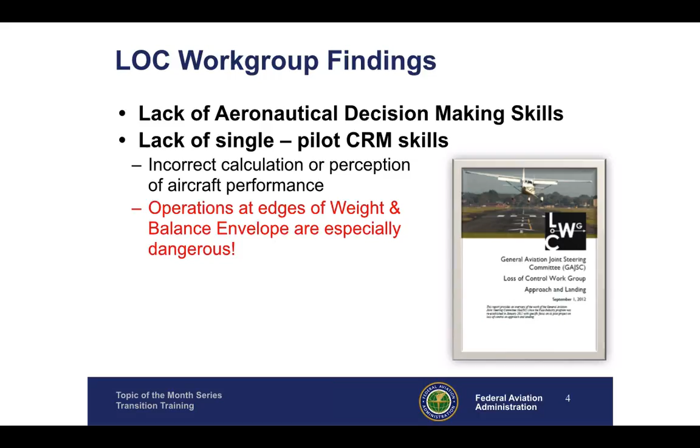Here are some findings of a recent study of loss of control accidents. Most fatal general aviation loss of control accidents cite inadequacies in aeronautical decision making and a subset of ADM, single pilot cockpit resource management skills. Occasionally, investigations have discovered causal factors resulting from unreasonable expectations of aircraft performance, especially when operating at the edges of the aircraft weight and balance envelope. That's why the Loss of Control Workgroup suggests improvement in pilots' understanding and calculation of aircraft performance.

When we speak of aircraft performance, we're usually answering three basic questions. How much can I haul? How far can I go? How long will it take me? It sounds simple, but an exquisite set of interdependent variables must be considered in order to answer each of these questions. Most of these variables have to do with aircraft performance, but the most important variable does not.

A good way to plan a flight is to decide how much weight you want to haul to what destination. Start with crew and passengers, then add cargo. If these items alone exceed your aircraft's capability, you'll either have to make multiple trips or get a bigger aircraft. Once you know how much you want to haul, you can figure out how much fuel you can take, and that together with your weather information will tell you how far you can go. If you have enough to get to the destination, plus alternate, plus reserve, you're golden. If not, you have to plan an en route fuel stop.

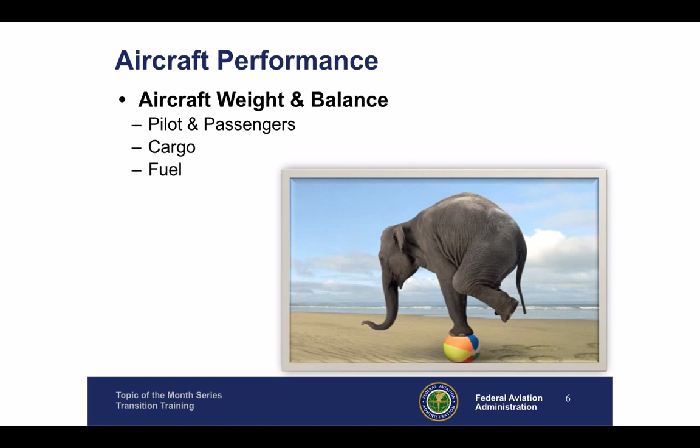But wait, there's more. You'll also have to consider your departure and arrival airport's runway lengths, obstructions, and expected density altitude. If the field is short and/or obstructed, you may not be able to safely fly with a full load. One more thing. Just because the book says the aircraft can do it doesn't mean that you can do it. Pilot skill and experience count for a lot when you're trying to duplicate Pilot Operating Handbook performance figures. So be conservative when you calculate your performance and consider adding a safety factor. Some pilots add 50% to their takeoff and landing calculations for safety.

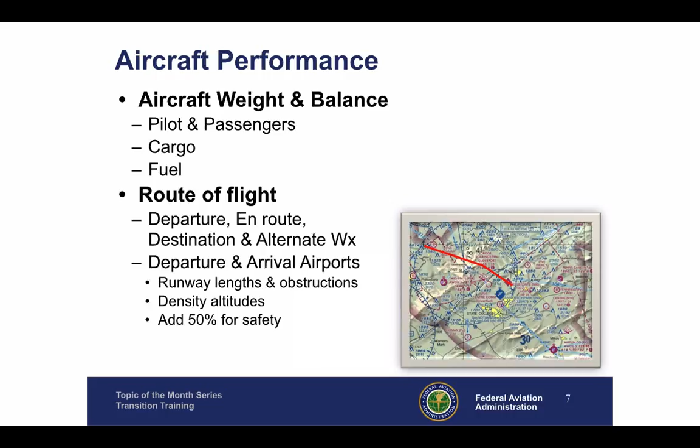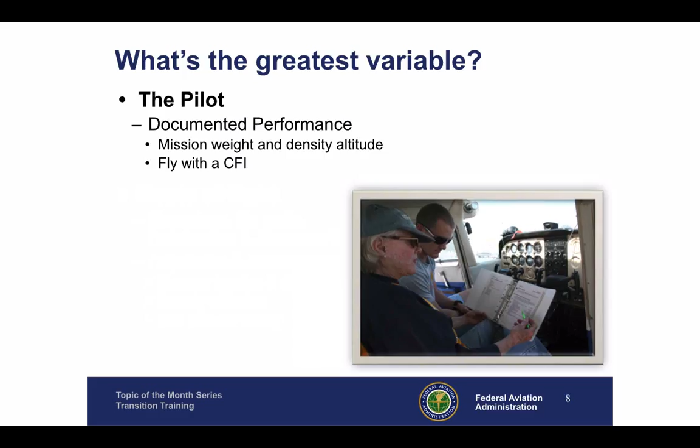Now we can figure all this out by consulting the POH, right? Well, maybe not. There's one more huge variable to consider, and I bet you know what it is. So what's the greatest variable in all this? That's right, the pilot. Let's face it, the POH figures and all your calculations don't mean much if we can't duplicate them in our flying. That's why it's important to document your performance capability at least yearly with a certified flight instructor. Fly a typical mission, weight, and try to duplicate or simulate mission density altitudes. That way you'll know what you and your aircraft can do.

In order to know what performance you and your flying machine are capable of, you'll need to establish a baseline. Think of your baseline as an omnibus reference that relates pilot and aircraft performance under a given set of environmental circumstances on a given day. Human factors such as fatigue, environmental factors such as higher density altitudes will result in performance below the baseline, while proficiency training and lighter loading will likely result in above baseline performance.

The key point to remember is that for any given flight, you need to determine how you and your aircraft will perform. Your baseline is the foundation of the determination.

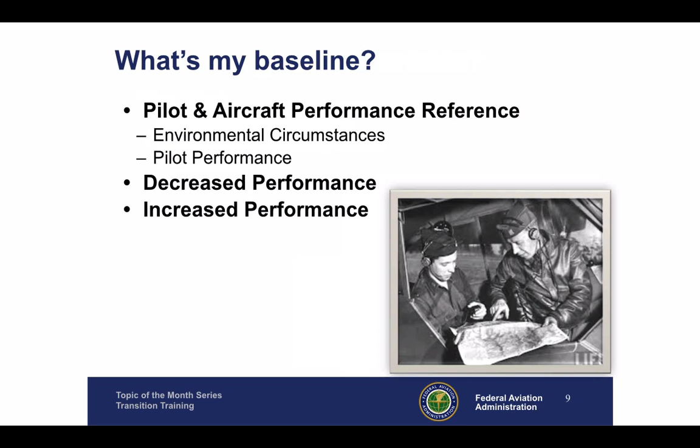Here's a sample baseline calculation sheet extracted from the Alaska off-airport operations guide. The guide is available at a URL below. I set one up. It's expertaviator.com/flyalaska. To establish your baseline, we suggest you load your aircraft with a typical mix of fuel, cargo, and passengers. We recommend that one of those passengers, of course, is your flight instructor.

Calculate your test weight and note runway conditions, elevation, density altitude, wind direction, and speed. Also note what rotation and climb speed you intend to use and calculate 70% of the rotation speed. We'll explain why this is important in the next slide. Next, you'll fly several takeoffs and landings, noting your performance on each trial. When you're done, you can average your performance figures and complete your baseline chart.

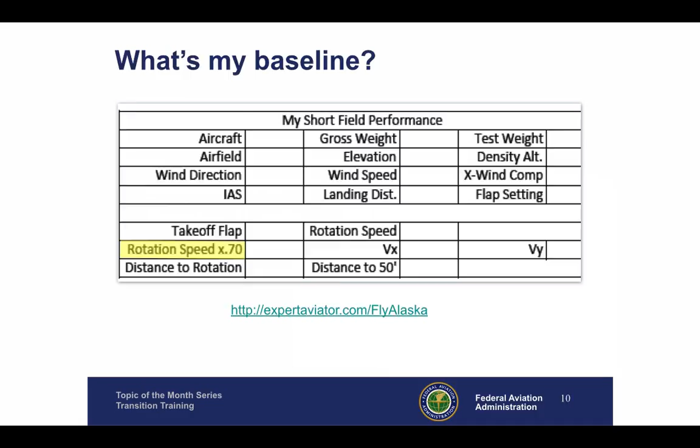Here are some rules of thumb when making takeoff calculations. If you have a fixed pitch propeller, add 15% to your calculated takeoff distance for every 1,000-foot increase in density altitude up to 8,000 feet. For constant speed props, add 12% per 1,000 feet of density altitude up to 6,000 feet.

When planning takeoff from short, unobstructed runways, establish a landmark at 50% of your calculated takeoff distance. When on takeoff roll, you should have 70% of your rotation speed at that point. If you don't, the safest thing is to abort the takeoff and reduce weight, or wait for more favorable wind and temperature conditions. In this example, we're assuming a rotation speed of 60 knots or miles per hour. 70% of 60 is 42, the number you'll want to see at the halfway point.

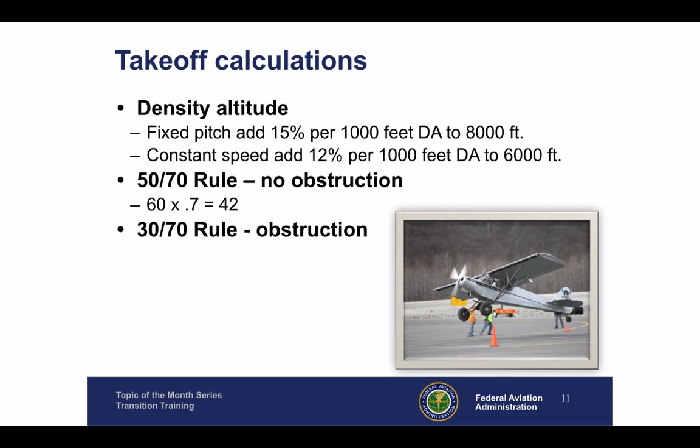If you must clear obstructions on takeoff, you'll need to have 70% of your rotation speed by the time you travel 30% of your available takeoff distance. You'll want to be stabilized on final approach with flaps full at 1.3 times the stalling speed in landing configuration. Don't cut your final short. Make it long enough to be stable and go around if you're unstable.

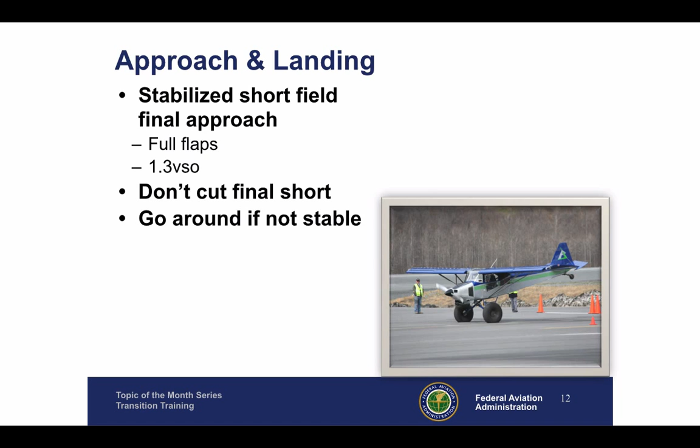By the way, the photos on this and previous slide are of an annual takeoff and landing competition held in Valdez, Alaska. We strongly suggest you don't try this at home without some quality instruction. Once again, the greatest variable is the pilot, but if you document your baseline performance at mission weight and density altitude and fly regularly with a CFI, flight instructor, you'll be well on your way to safer flying and few nasty surprises along the way.